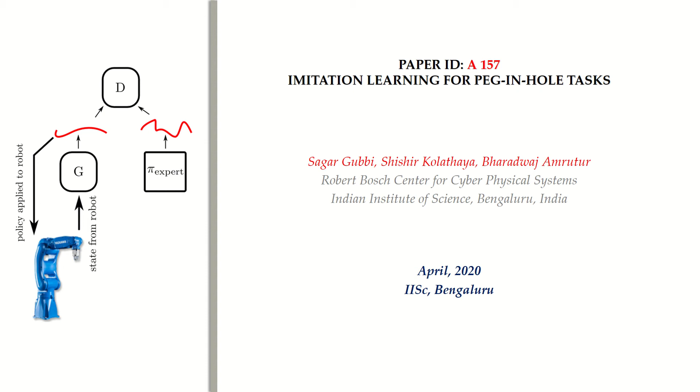I will be talking about imitation learning for peg-in-hole tasks. This is in collaboration with Sagar Gubbi and Bharadwaj Amrutur from Indian Institute of Science. We are part of the Center for Cyber Physical Systems. This project was funded by Yaskawa Robotics, who are particularly interested in contact-rich tasks.

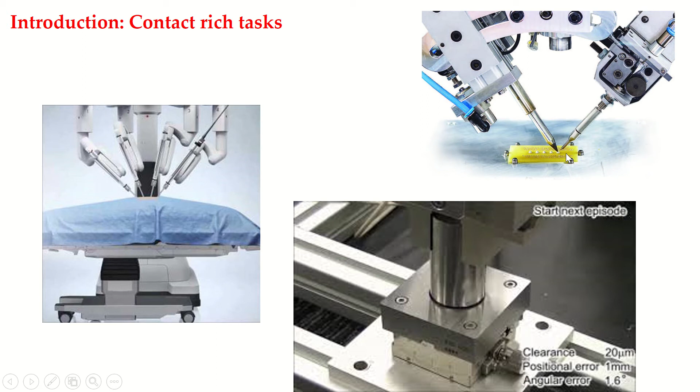For example, here we have on the left a surgical robot where the end effector is continuously in contact with the tissue. On the right we have the soldering robot, and we also have the peg-in-hole task. Yaskawa is very interested in peg-in-hole tasks because they have quite a few applications.

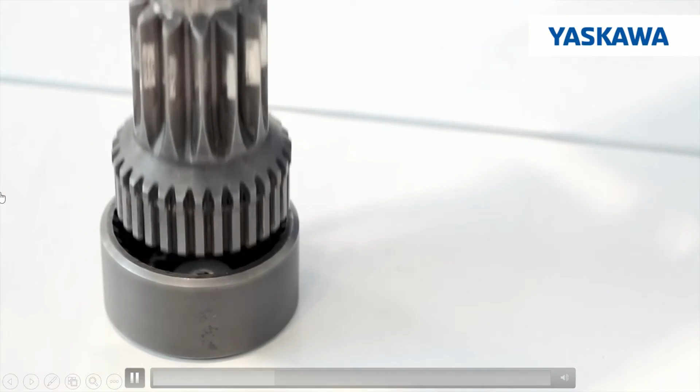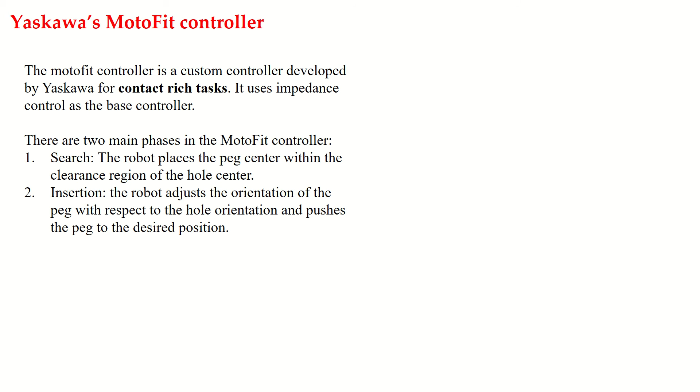Here is one example, where the gear is being inserted inside the ring using a technique called impedance control. Yaskawa has its own custom controller called the MotoFit controller, which uses impedance control, particularly useful for contact-rich tasks. Peg-in-hole is a classic example, where the peg is inserted into the hole, and there is constant interaction between the peg and the hole, with forces being read by the sensor.

Here we have the torque and force sensors, which measure the torques and forces in all three directions. Based on the measurements taken here, an impedance controller is applied to realize insertion.

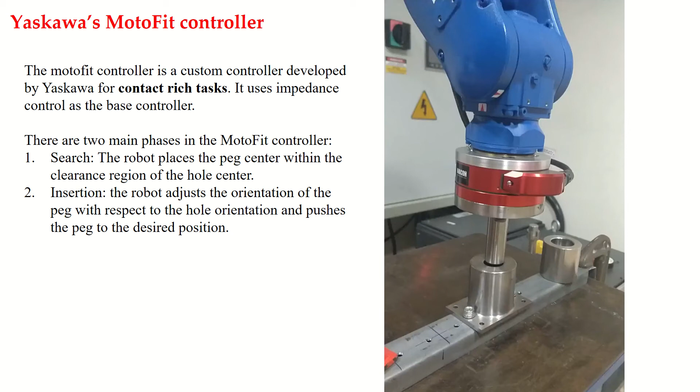There are two main phases in the MotoFit controller. Phase one is the search phase, where the peg is searching around, trying to find the depression in the hole. Then there is the insertion phase. As soon as the depression is found in the search phase, the insertion phase is initiated, where the peg is inserted into the hole by applying a constant downward force, called pressing.

Here is an example of a typical MotoFit controller applied for the peg-in-hole example I showed previously. As you can notice, it applies some forces along the x direction, no force along the y direction in this trial, but a constant force of minus 25 Newtons downwards, Fz. It applies no torques in this case.

As you can see, the position of the peg, Pz, is constantly decreasing, meaning it is going inside the hole. Also notice the changes in the roll and pitch angles of the peg, which constantly go towards a constant value, almost zero in this case.

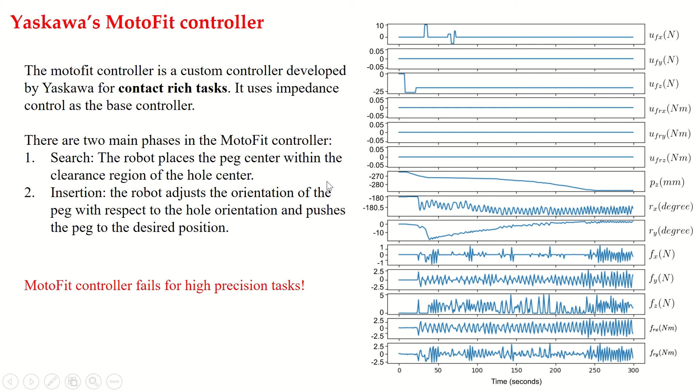Also notice the forces measured by the sensor, Fx, Fy, Fz, Frx, Fry — they seem to be very, very noisy. This is the problem. Because the measurements are noisy, it somehow works for higher clearances, but not for lower clearances. It fails for high precision tasks.

When I say high precision, I'm referring to less than 10 micron clearance. Why 10 micron in this case? Because the robot we used had a position accuracy of close to 100 microns. So the position accuracy required is less than 10 microns, which was not possible with the robot we had — such robots are either non-existent or very expensive.

At the same time, we have to understand that the torque sensor we used is only 6-axis, so we get 6 values. On the other hand, the haptic feedback typically used out there is not enough, and it's not even good enough in our case.

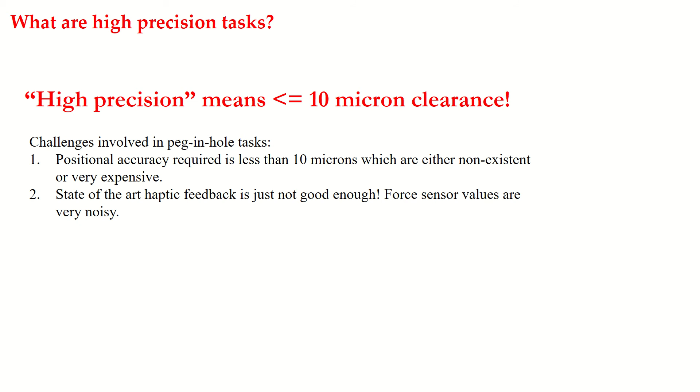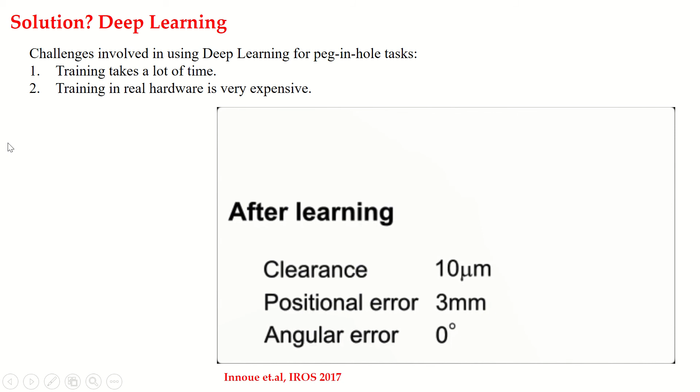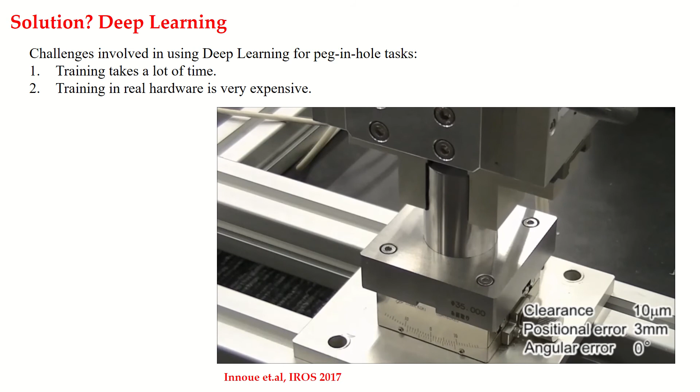But they took a lot of time to make this happen. So there are quite a few negatives to take from this. The training time takes a lot of time. Training time is huge, and the training in real hardware is also very, very expensive, right? So the goal in our case was to somehow try to reduce this.

And we wanted to take cues from humans themselves, because humans are able to achieve these tasks. Even if the accuracy is not enough, they are able to do this with ease, right? They are able to sense the forces and apply the corresponding torques and forces on the peg. And they're all doing this without even using vision-based feedback. It's all contact, right? All touch-based sensors.

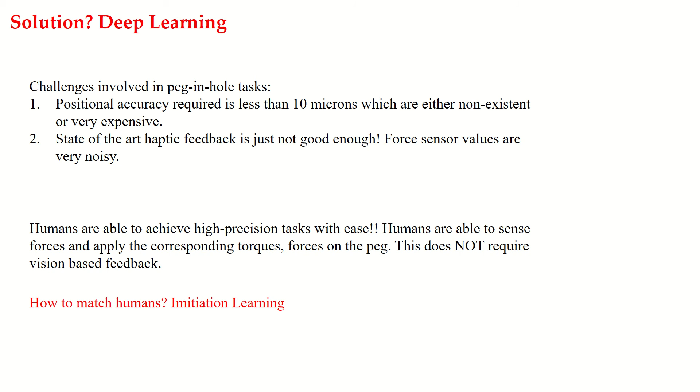So the solution that we tried to achieve was, why not achieve very fast peg-in-hole tasks by copying the humans, by using imitation learning. So this is the goal of the talk: how to mimic humans by inserting peg-in-hole, mimicking humans through imitation learning.

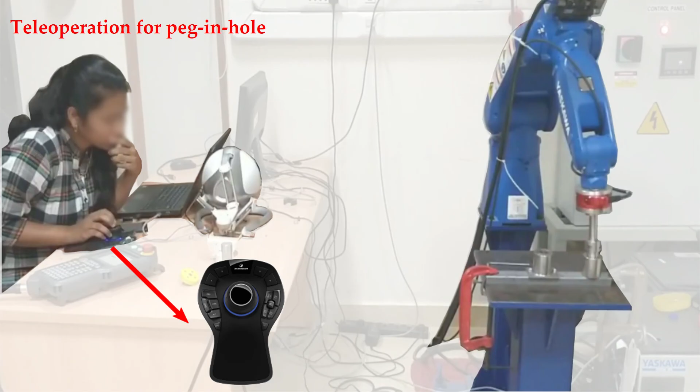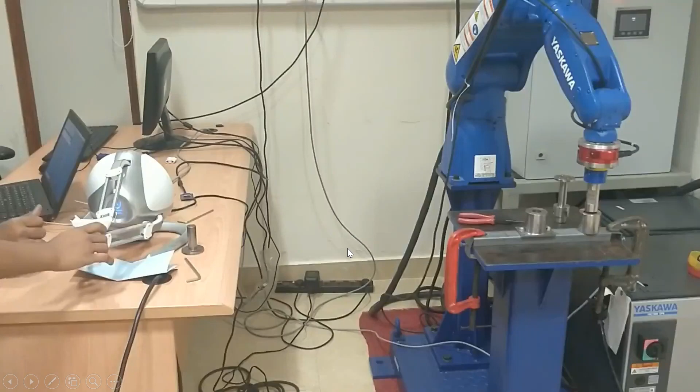So we'll start with the first one, how to collect data. In order to collect data, we used teleoperation. So here, as you can see, the person on the left-hand side is using a 3D mouse, a remote control device to remotely operate the robot. It provides 6 inputs, and based on these inputs, the robot accordingly goes in, for the peg-in-hole task here.

So the person on the left is remotely operating the robot by reading the forces from the laptop. Once that is done, the peg is slowly being inserted here. So we collected like 10 demonstrations, 10 insertion data, and based on this data, now the goal is to realize the same in the robot. And we used GAIL.

So the objectives are very clear, right? We have human expert data demonstrating the insertion, and there is no way for us to evaluate the reward. The moment we talk about reward, we are actually talking about reinforcement learning. Reward in the traditional sense of deep reinforcement learning made sense, where the goal is to achieve peg-in-hole, so you simply give a very high reward as soon as it is successful.

In our case, we did not go for calculating explicit computational reward. Our discriminator will give us the reward. So the generator and the discriminator play a game between each other. There is a game where the generator tries to match with the expert policy distribution, and at the same time, the discriminator distinguishes between the generator policy distribution and the expert policy distribution. So each one is trying to fool the other, each one is trying to outwit the other.

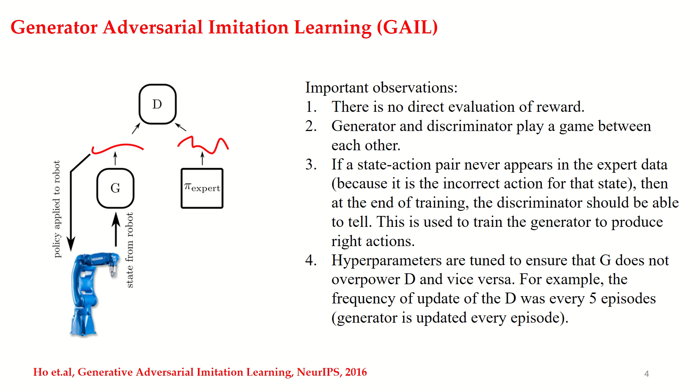Right, so using this technique, the goal is to try to copy the expert data. Our generator network has 1 convolution layer, and then 2 hidden layers, and then we have an output layer here.

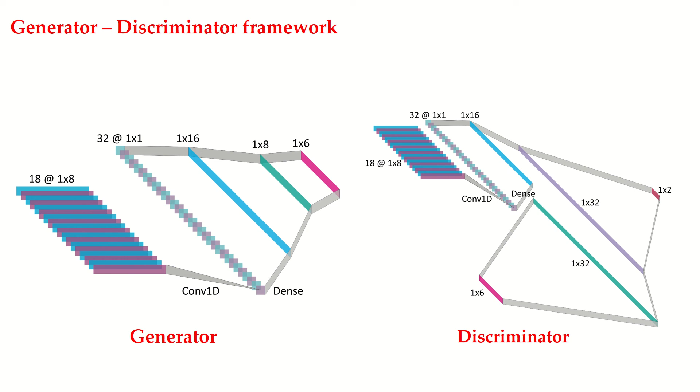Similarly, for the discriminator, there are 2 inputs: one from the generator and one from the expert policy. We compare the two and determine if it was fake or not. Using this technique, we are able to come up with a generator policy after some training, and the policy determines how to insert the peg inside the hole.

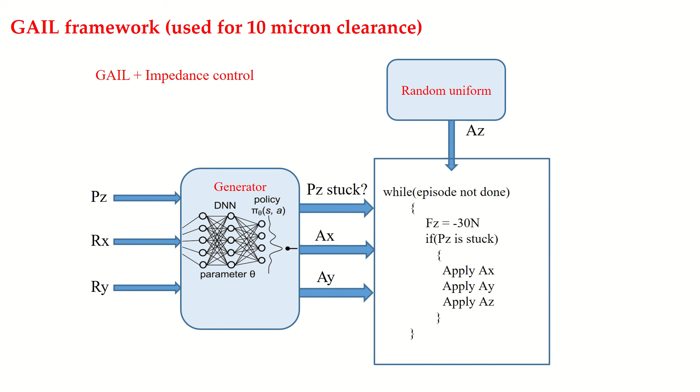So this is one framework that we used for the 10 micron clearance, where the goal is to apply some forces whenever it is stuck. The generator will tell me if the peg was stuck or not. We observe the past 10 or 8 samples of the vertical position of the peg, Pz, and based on that, we determine if it was stuck. If it is stuck, we apply forces along different directions — in this case Ax, Ay, and Az.

We did the training for about 10 episodes, and it started with 20 seconds insertion time, which is as good as a failed case. Gradually, after about 10 episodes, the insertion time improved to 8.7 seconds — a 10-second improvement for the 10 micron clearance.

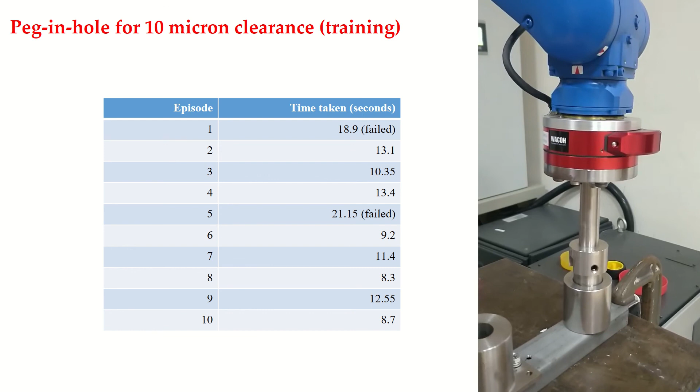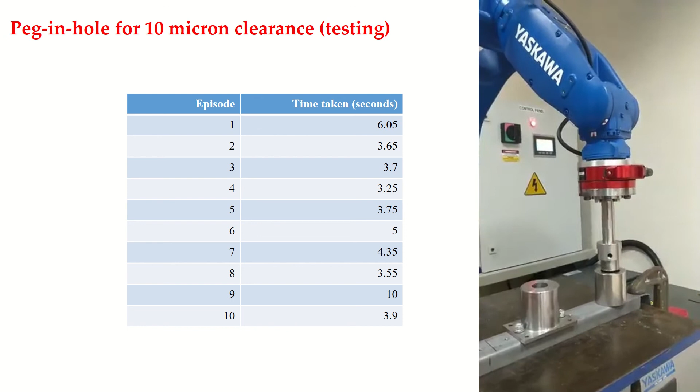Similarly, for the testing phase, after it was fully trained, we ran 10 trials and it successfully inserted the peg 10 out of 10 times. The average insertion time was close to 5 seconds, 4 to 5 seconds.

We used a slightly different, simpler framework for the 6 micron clearance, where the output of the generator only gives two options. The generator will tell me whether to wiggle or not to wiggle, or whether to press or not to press — both are independent outputs.

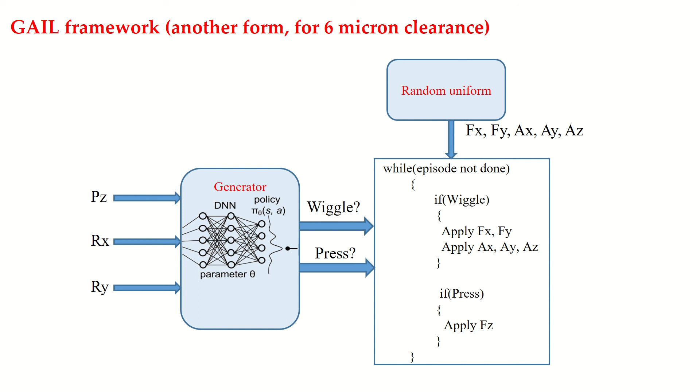In every episode, every time step, we check if the wiggle was turned on. If it was turned on, we apply random forces across different directions. If the press is enabled, we simply apply a vertical force of minus 30 Newton. We have the expert data, compare this, and run the GAIL during training.

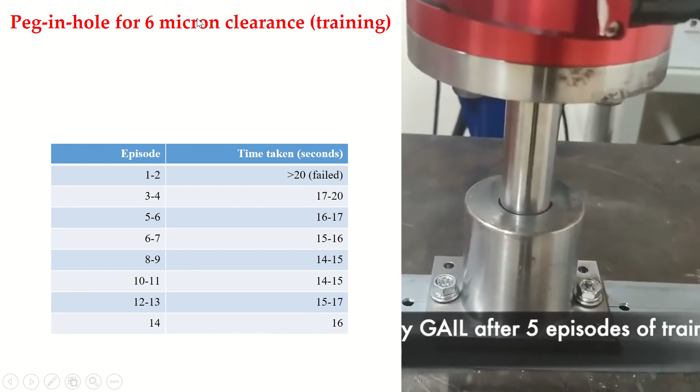After 5 episodes, it was able to finally insert. We did this for the 6 micron clearance as well. Remember, we started with 20 seconds insertion time, and it gradually decreased to 14 to 15 seconds. This is not as great as the 10 micron clearance, but because the clearance is much smaller, 6 microns, it's not so easy to insert.

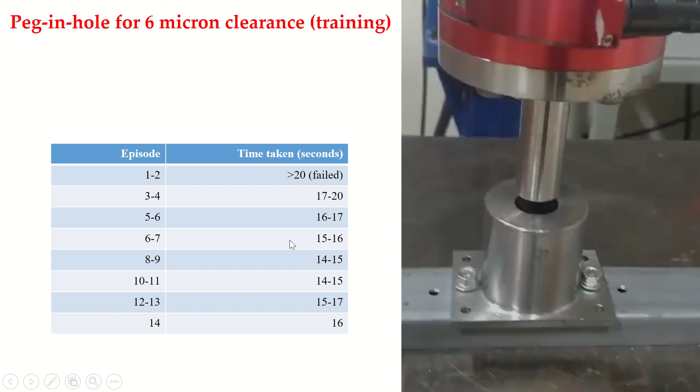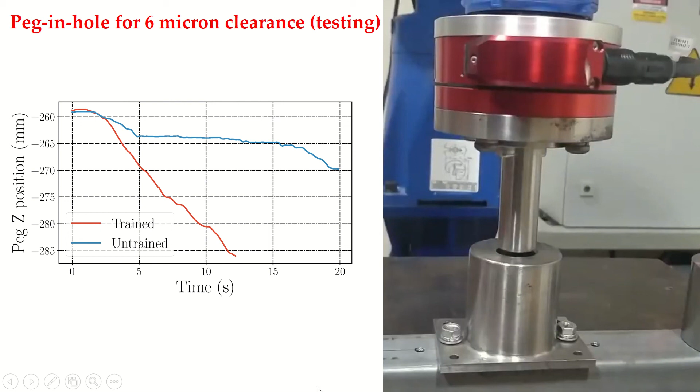Here is the comparison between the trained and the untrained policy. As we can see, the blue curve corresponding to the untrained policy is not able to insert successfully. On the right, we can see that the insertion is indeed successful.

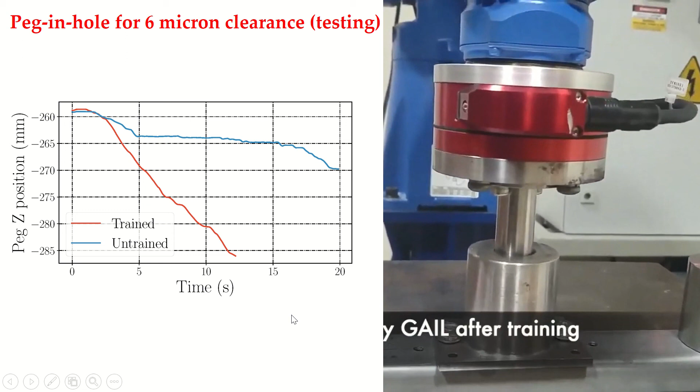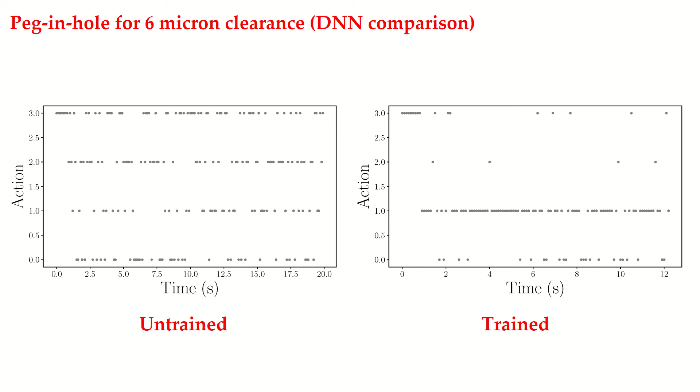Here is a comparison between the trained and the untrained networks, just to see what it really learned. On the left-hand side, the distribution is more or less uniform — it looks very random. On the right-hand side, the distribution looks more regular, more proper. This shows that the network has trained well.